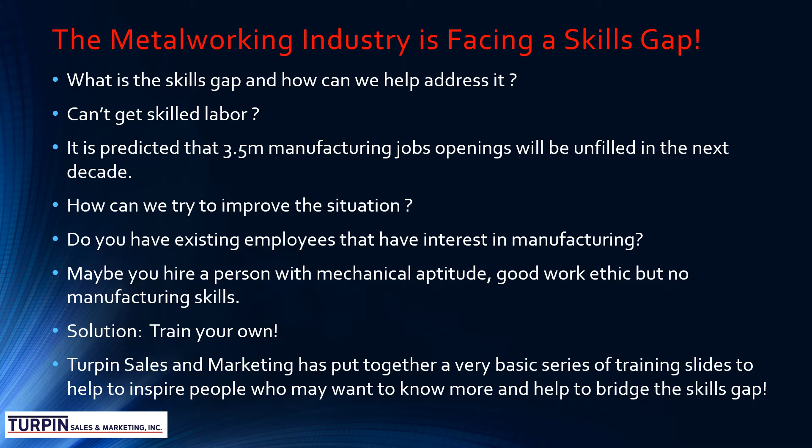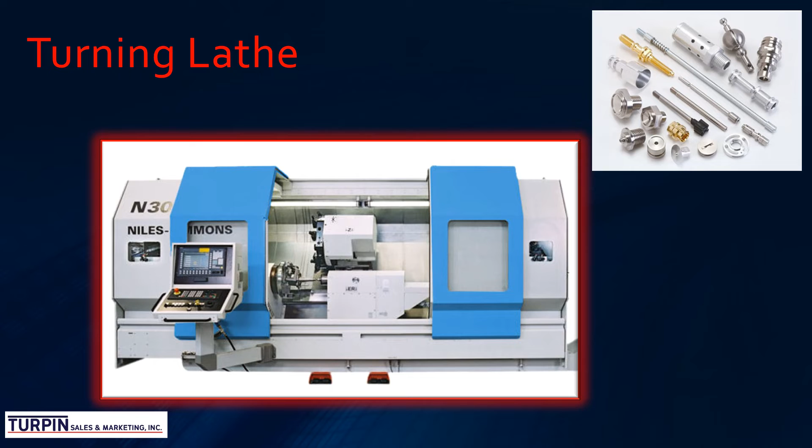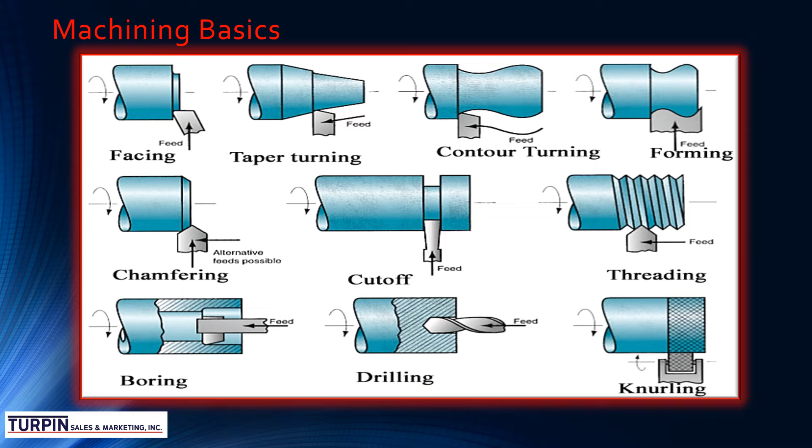In our last presentation, we discussed the different types of machines that can be seen on the shop floor. In this presentation, we will concentrate on the lathe. Lots of different operations can be done on the lathe, and you can see them on this slide, from facing, taper turning, contour turning, to knurling, drilling, boring, etc. We'll take a quick look at each one of those.

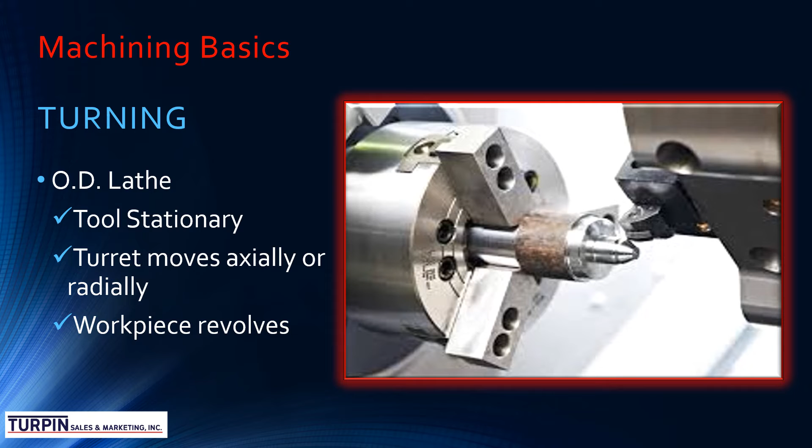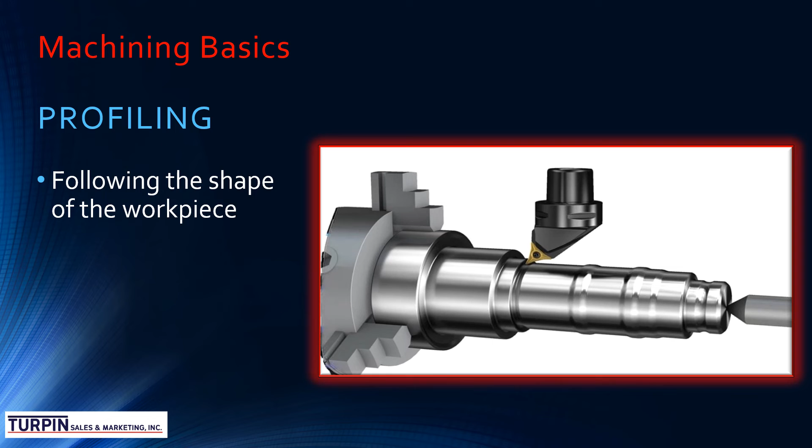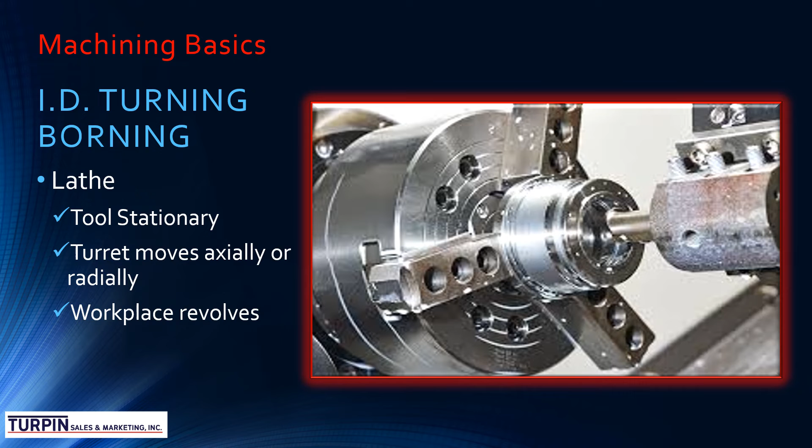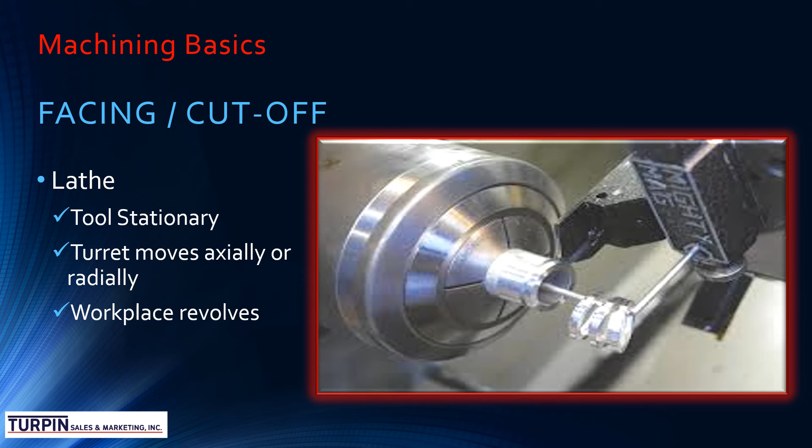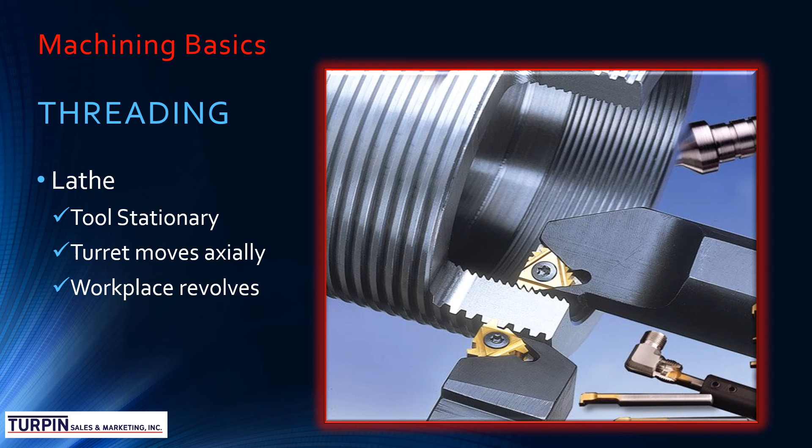As we saw on previous slides, internal and external turning, or boring for the internal and turning for the external, we can produce threads, both internal and external. The main difference here is that the insert is produced with the pitch of the thread on the insert, and the feed rate is programmed to the pitch of the thread. So as that insert moves along, it produces the thread. Normally it would require multiple passes to produce the thread.

The final one we'll take a look at today is grooving. Again, all the same principles apply. The component rotates, the tool is stationary but moves along axially or radially. You can see on this that there are multiple types of groove. It could be an O-ring groove, it could be a clearance groove, it could be wide, it could be thin. Lots of different reasons for putting a groove into a component, but exactly the same principle. You may have noticed a theme throughout these slides, but it's all very, very similar on a lathe.

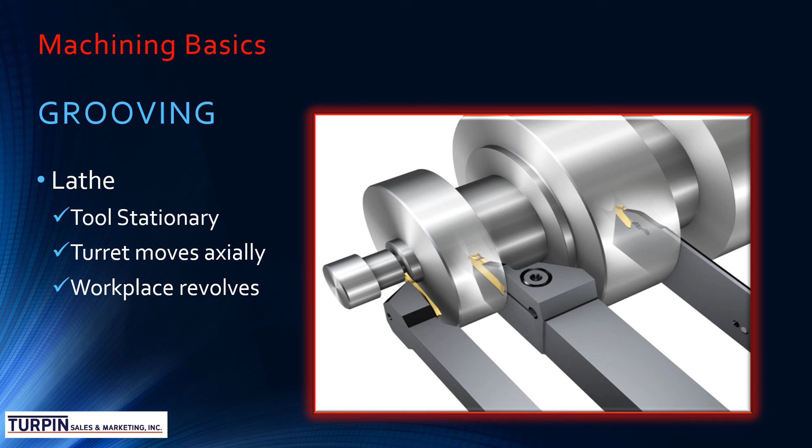That concludes the second in a series of basic machining videos.